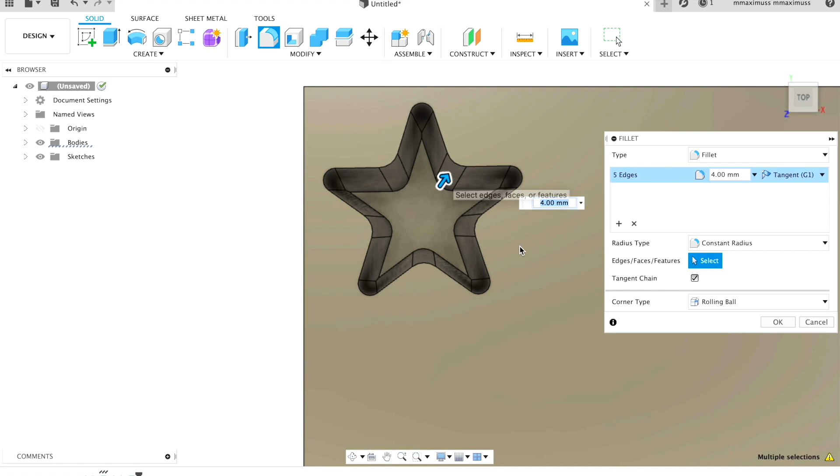So now when we've finished designing, it's time to print it out. So I've been using my printer almost a year and I didn't know that I really need to calibrate my extruder in order to get better quality of my prints.

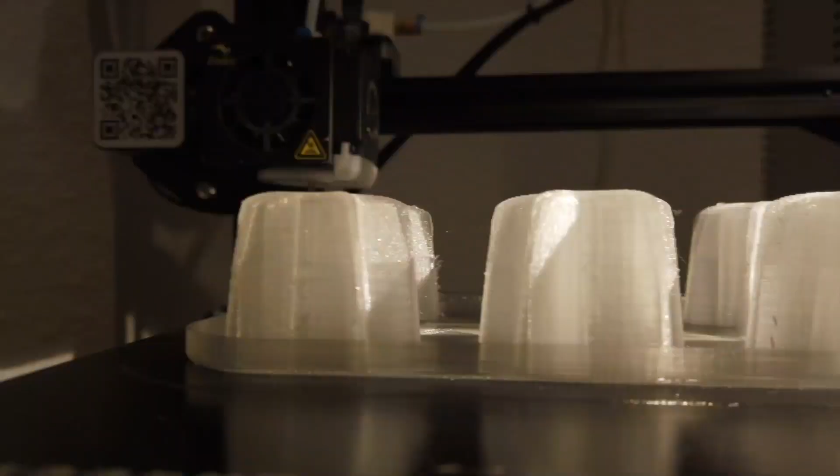So finally, after the 16 hours print, we get our tray. Well, it is flexible, but now the hardest part is to remove this support from the tray. I knew already it's not gonna be that easy because TPU sticks pretty good and it's gonna be a little bit hard. And we get these little stars as a bonus.

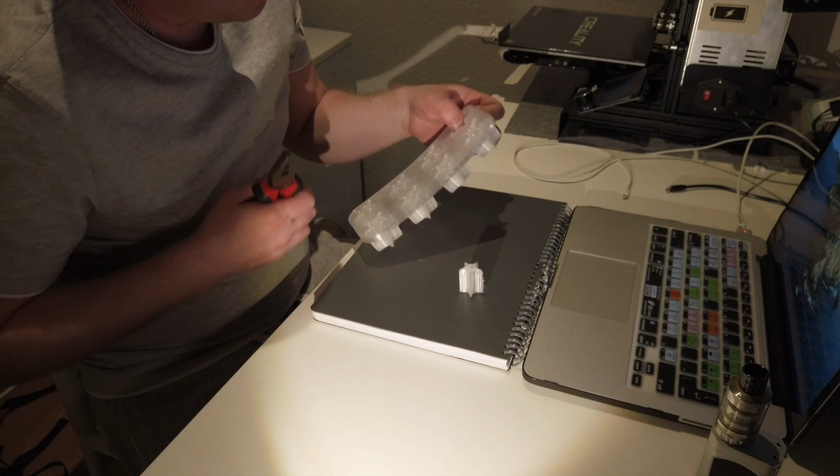I'm really scared to break it, to make a hole, you know, the water can leak, but that's what we gotta do. When we get rid of support, now let's clean it a little bit.

Okay, now when it's pretty much clean, I wanna burn it with my lighter. I don't know if it's a good idea, but I will do it slightly inside, so that the holes, micro holes, these small tiny holes, I don't see them, but I think they do exist because we were removing these funny stars. Okay, let it cool down a little bit.

I'm gonna add a small fillet so that the stars will be attached much better to the base, so that when you're popping out the ice you won't be able to break it, but it's still pretty hard. And I think it's time to fill it up with water and put it in a freezer.

I cannot say that it's perfect. I see that it was leaking from the bottom, so basically that means either I have to make the bottom part of the tray a little bit thicker, or maybe put it in the oven. Let's see how it's detached from the actual tray.

After warming up with water, that's how it looks. Looks pretty awesome. It works. So in conclusion, it came out very nice, very clean, it is flexible. The only problem was actually taking out the ice from the tray.

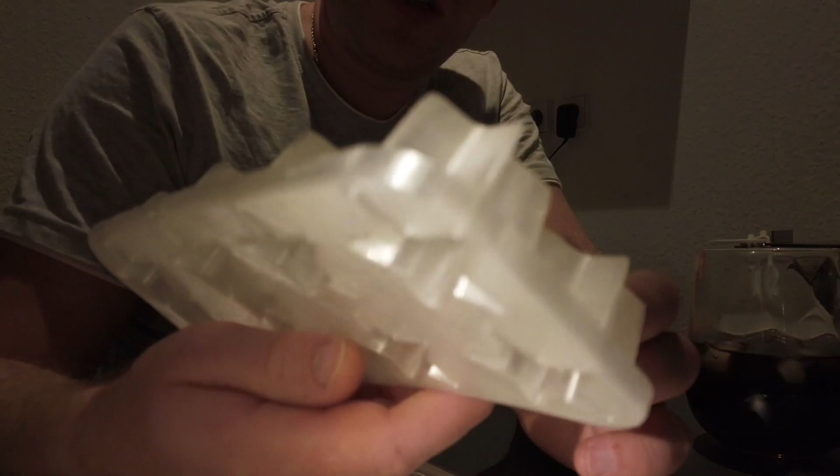So what I did, I put it under the hot water for around 10 seconds and then I just did like this and they automatically came out. The cubes are big, so one per glass is enough. I found some leakage here at the bottom when I took it out from the freezer.